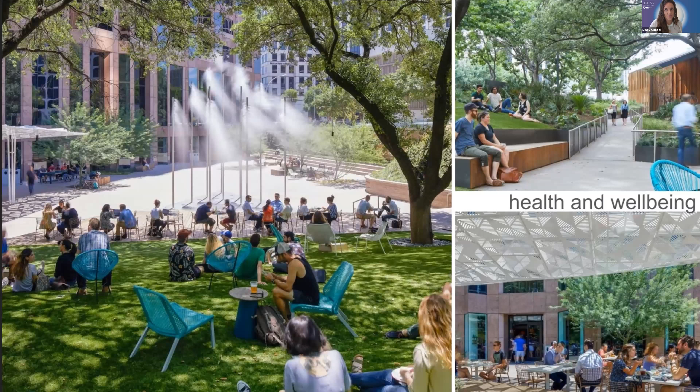We've taken big steps trying to achieve those goals on projects like 111 Congress, where we transformed a depressed plaza - you may call it depressed, you may call it depressing, whichever way you want to look at it - into a vibrant social space for eating, playing, escaping the city.

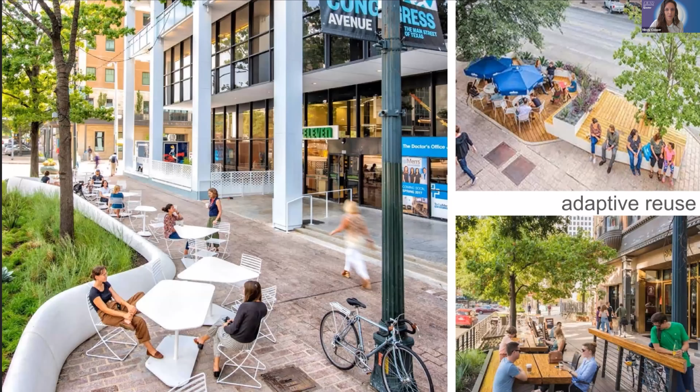We've thought outside of the bounds of typical permitting and ownership limitations to introduce things like pocket patios to Austin, reclaiming public space for people from all walks of life instead of just parking spaces that serve just a select few.

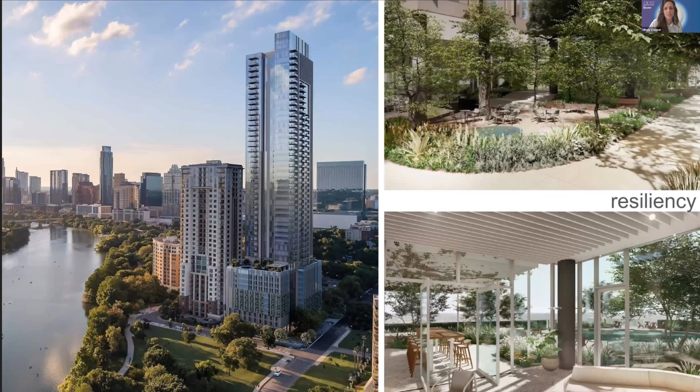We've designed experiences on both the ground floor and up in the sky, as evidenced here on a project called 44 East in the Rainey District.

And we've sought the highest level of sustainability in all that we do, as evidenced in our commitment to 100% auxiliary water use and innovative soil science towards the goal of carbon neutrality, as seen here in our Parmer campus project.

So this session is going to tell yet another remarkable story about transformation and how a highly collaborative partnership has moved the needle one step closer to achieving our vision for the future of great social and environmental change in our city. Daniel?

Yeah, thank you. And I'm getting distracted by the Zoom haircut that I'm getting. I spent hours curling my hair this morning, and we believe you.

Staying focused on this - every great story, every great transformation starts with a sense of place, a sense of history, and this project is no different in that.

For us, Fontaine Plaza and St. John's tell a really remarkable story - a story of individuals like Jacob Fontaine, and the story of the St. John's Encampment Commons. It was really about understanding and working with leadership in the African American Black community here in Austin, about understanding the purpose of Fontaine and of this place in its history, about education and raising up leadership.

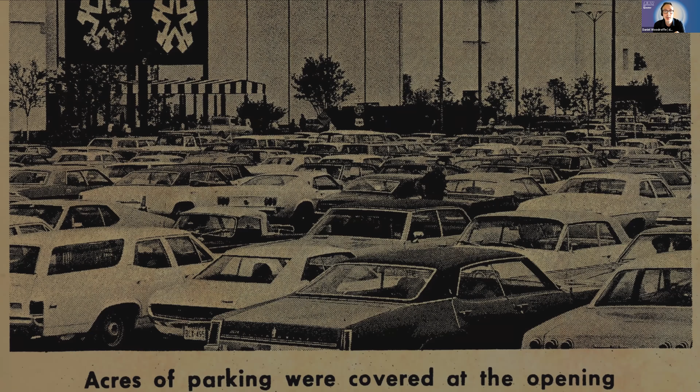It was certainly all parking lot and no parks. And one of the things that's really remarkable for us is that Highland has become this national model for a P3 partnership about education, anchored with sustainable, adaptive, and community-minded use. Go to the next slide.

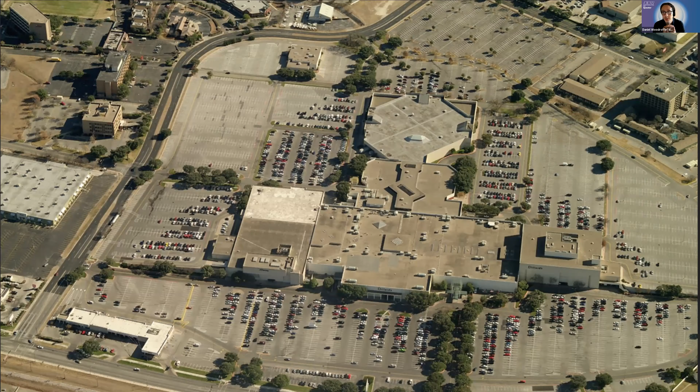Here you see the extent of the mall - it's almost 80 acres of concrete and asphalt. And the next slide again.

So a number of years ago, Red Leaf Properties led the effort to form a public-private partnership with the Austin Community College to acquire and redevelop this property - the literal sense of transformation of taking a now defunct mall that had closed and reinvigorating the entire 80 acres.

Of this 1970s era shopping mall into an innovative learning center, transforming the surrounding parking lots into a really social and equitable mixed use urban project that has a combination of signature parks and trails, and today is quickly becoming one of the premier destinations to work, educate, recreate, and explore. But it's also really importantly home to Austin Community College's largest campus.

And it's rapidly emerging as this kind of really profound model of diversity and social and equity, and a place to work and educate, recreate. So for us to be participating in a small part about the landscape transformation was really, really special.

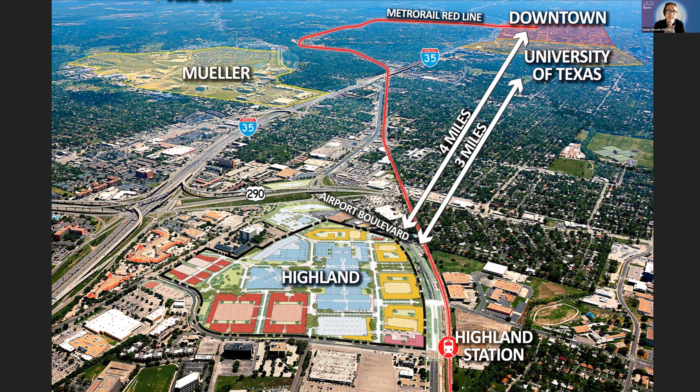So I'll hand off to Lauren now just to go into a little bit more detail about the how and the why. Sure.

So the overall project massing and orientation is an example of a true mixed use development, as you can see here.

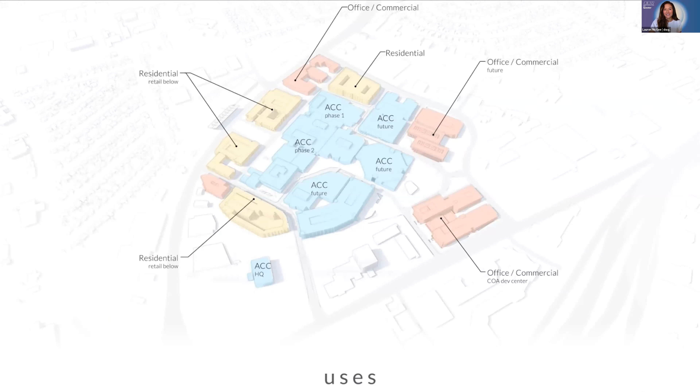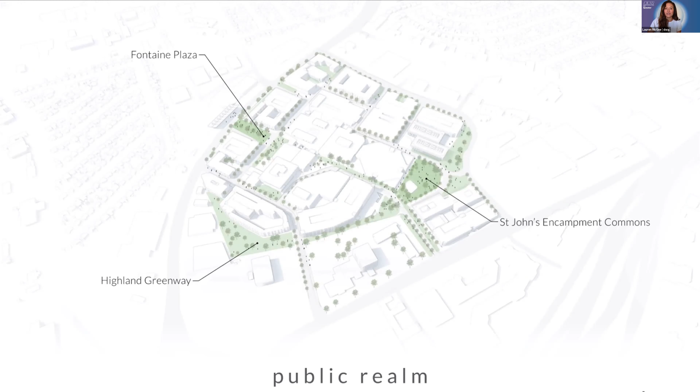Thank you, Mindy. The two signature gateway parks are strategically located at the ends of a green spine that bisects the centrally located ACC campus, Fontaine Plaza on the west, and St. John's Encampment Commons on the east. Together, they serve as anchoring points for the campus and are also major moments along the linear hike and bike trail that encompasses the entire campus. Fontaine Plaza is a 1-acre park that aligns with the original mall entry drive and will in time be in alignment with the future relocated Red Line station.

I'll hand it back over to Daniel. Thank you. So as designers, there is a huge importance on this process of storytelling and about really doing our due diligence to understand the cadence of the project, not just the project boundaries of what the client has dictated and mandated through a project brief, but understanding the sense of place, the sense of purpose and time and storytelling that occurs.

And for us, we believe very strongly that a project should start with a very clear thesis. And that thesis for Fontaine Plaza was very much inspired by Austin Community College's own guiding North Star about the community college district will be recognized as the preferred gateway to higher education and training, as a catalyst for social equity, economic development, and personal enrichment.

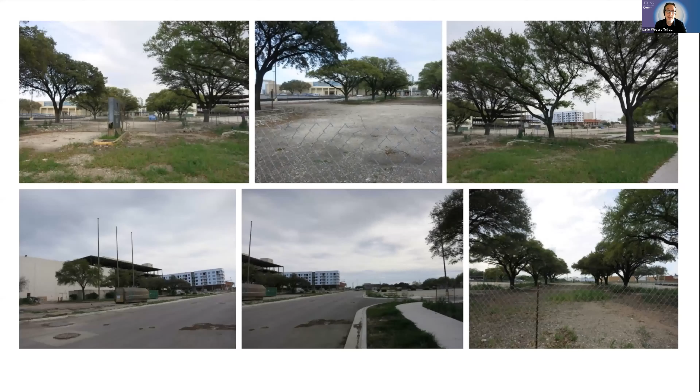And that starts with analysis. And that analysis really looked at the sense of, as Lauren had stated, the parking lot to park, the sense of the former road into the mall now being this potential for a park. And one of the major assets that we had was a sense of existing trees.

We developed a very clear program that looked at understanding that green spine. And through that, in terms of working with Redleaf and with McCann Adams and also with the adjacent design teams of TBG Partners and Lake Flato and a host of others, Coleman and the architects for Highland ACC itself, this really kind of collaborative process of understanding how we can build this thing up.

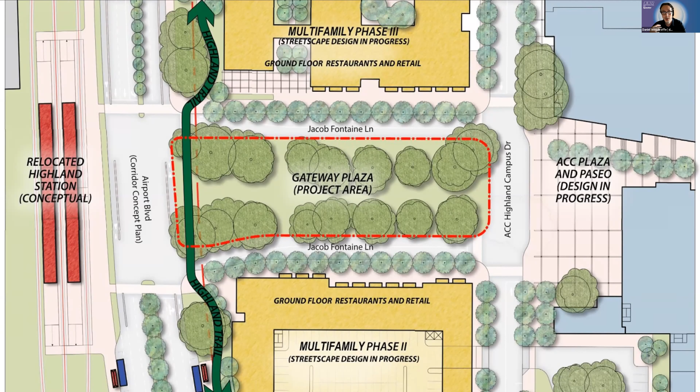And we often start in an analog formation about really understanding the sense of movement and flow and gathering, and that sense of how we can not only connect edges, but also create these inspiring moments at a variety of scales that help to weave a story, a thread through this process.

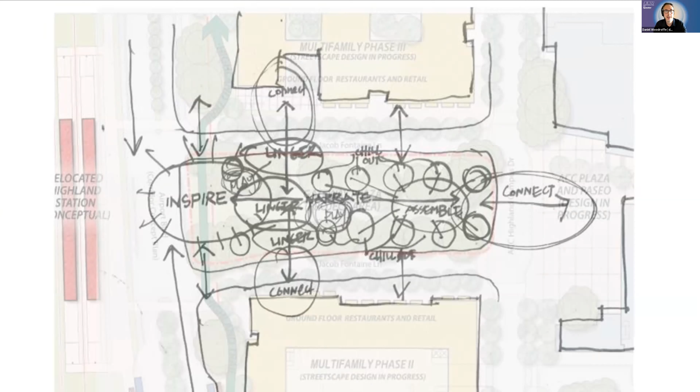But that process is not singular, it's very much a nonlinear and iterative process of testing and retesting. And so it starts with analog sketches. It starts with understanding the limitations or requirements of preserving and enhancing the trees and considering them a vital infrastructure.

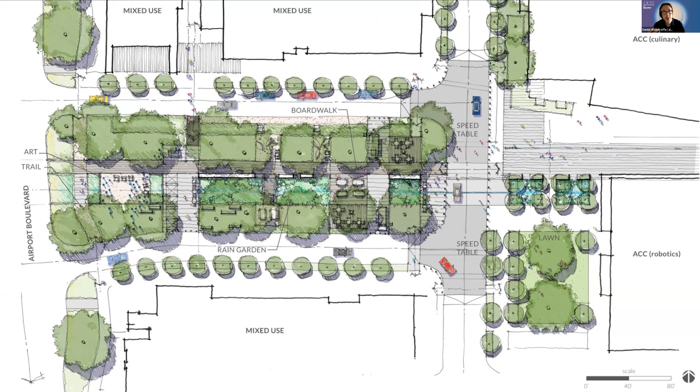And then as we move through the design and start to develop digital massing models, so we move from a plan view indication and diagrams about form and space into more of the three-dimensional, even four-dimensional in terms of how we imagine ourselves being in these spaces.

And it allowed us to quantify and develop metrics about this project having a profound impact on impervious cover and about impacting the environment larger than just this project, by deducting the road and deducting the parking lot, seeing up to an 85% reduction in impervious cover.

And as a result of the additive process of landscape and lawns and preserving those trees, the site now effectively becomes a sponge and is able to intercept and filter almost 500,000 gallons of water a year that would otherwise have just flowed downstream into the storm drains.

And so as a design challenge, it was also about not just understanding how to save the trees, but how to promote as a baseline that the sense of sustainability, the sense of sustainable sites, is very attainable not as a mandate, but as a baseline expectation of what a really great project could be, and doing that in a way that actually demonstrated to the client that it didn't cost any more. And so we were very thoughtful of that.

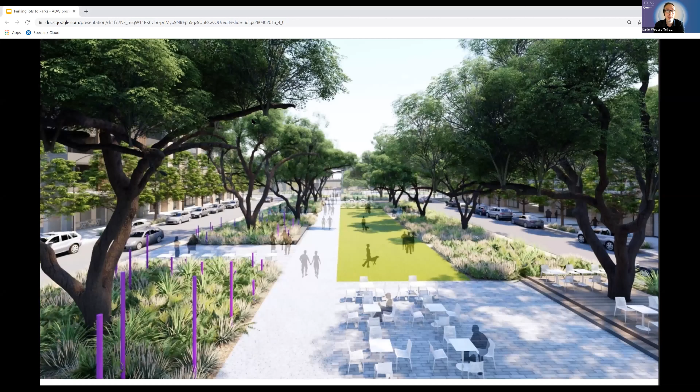ACC actually wanted to put a big monumental blade sign on Airport Boulevard and said, we want a giant ACC logo. We challenged that and said, would you entertain a more artful solution that looked at lighting as a really evocative tool? And that actually worked.

We developed a concept called Thicket that took an abstract of the ACC logo, the river bat, and imagined not an abstract of a bat itself, but bats with movement, bats in terms of the cadence of day and night, and a sense of embracing change and extending the life of this space for people, making it a really engaging and evocative space that changes throughout time of day, time of year.

That's where this sense of digital modeling allowed us to really create an image that was unique and special. We worked with Ion Art to prototype and come up with this. We've been very blessed that this project has now progressed.

So Lauren, yes, we would love to take you on a virtual tour of the construction, and this is happening.

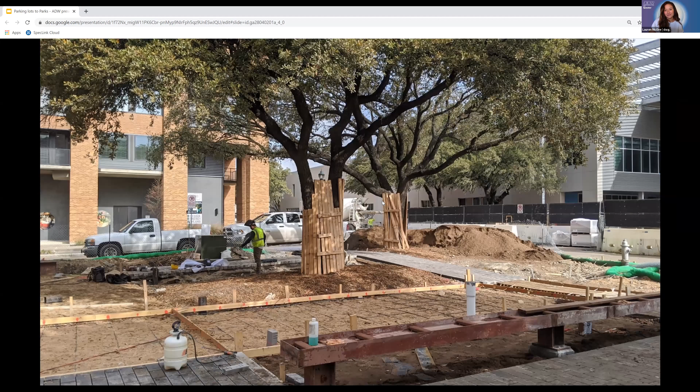Here, permeable pavers have been installed, and they're starting to install the reclaimed steel benches, which are made from salvaged beams of the old mall. We actually selectively tagged the beams to be used for these benches, just adjacent at an adjacent site. In the background is where a deck will be installed later on in the photos.

Something that was really important was working around the root zones and making sure that those footings were outside the half critical root zone for the tree's health.

Here in this photo, all of those little silver pipes sticking up are actually the footings for the art installation. There are 73 poles that are part of this art piece, and they range from 3 feet to 20 feet. So some of these footings had to be pretty substantial.

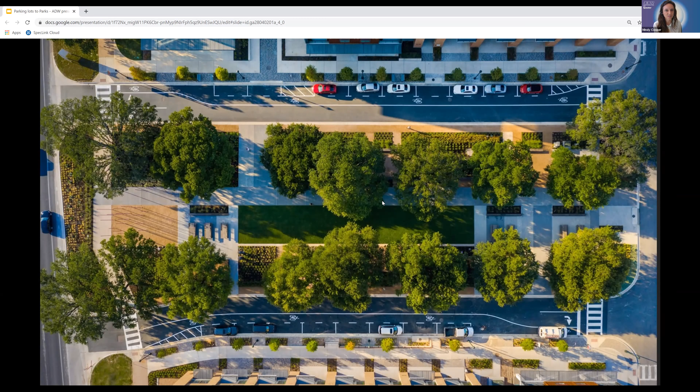At the end of it, when we were able to get some photographs of the actual thing, one of the most rewarding comments we received was, wow, the actual thing looks better than the model. So even in our perfect world in the computer, what actually got built is, I think, 10 times what we would have anticipated from just the drawings and vision alone. Our socks have been completely knocked off, I suppose.

The really great news is that with Fontaine Plaza complete, we've now been invited to join ACC and Red Leaf in looking at St. John's Encampment Commons, which was that eastern punctuation to the green spine Lauren described earlier. So we'll take a couple of minutes to give you a brief overview. That project isn't quite as far along as Fontaine, so we'll give you a little insight into what's happening there and what the plan is for St. John's.

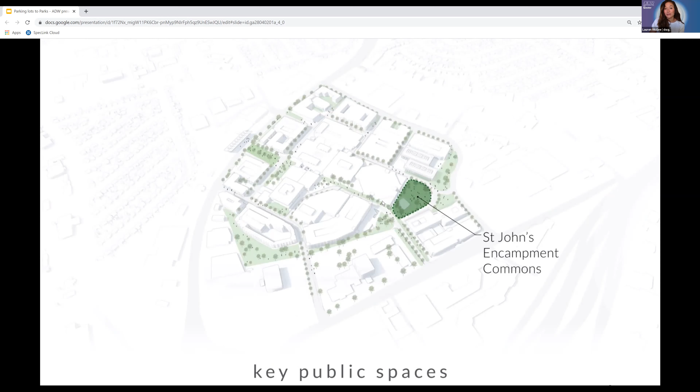Thanks, Mindy. As she mentioned, this is at the other end of the green spine. St. John's Encampment Commons serves as that gateway from the east and is located next to the new City of Austin Development Assistance Center. This park is a 2.4 acre flagship of open space for ACC and Highland.

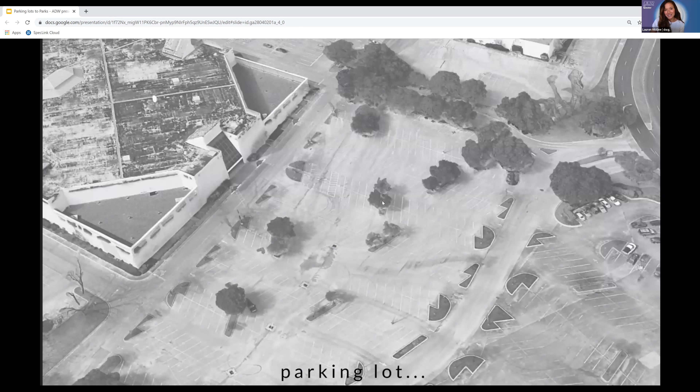And what once was a parking lot in front of the old Macy's building, a large, very large parking lot, has been shaped by a poetic vision, as you see here, that sustainably transforms the site.

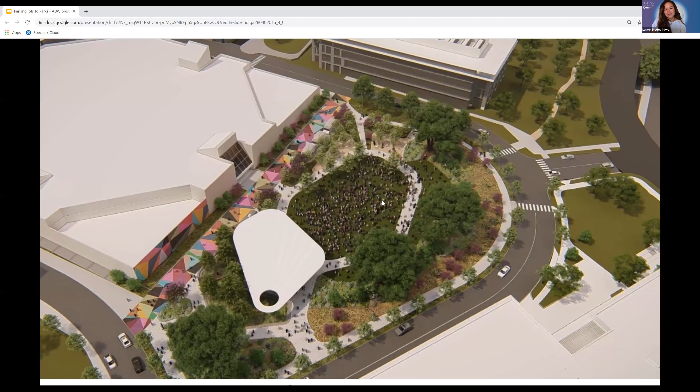Drawing on inspiration from the site's legacy as a place for gathering, the design provides areas for events and meetings, both small and large. It was envisioned to be a place to gather together, and ACC sees this park as an amenity, not only for the college but also for the community, to be a social hub where people can gather and celebrate.

Seating areas are tucked under groves of trees to provide refuge and respite on hot Texas days. And there's an ample amount of flexible open space to accommodate a variety of programming and the daily cadence of life within the Highland community.

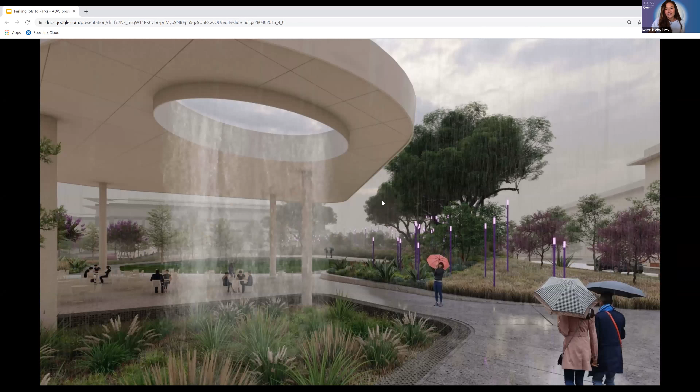There's a large emphasis placed on sustainability with low impact design, innovative water quality solutions, and reduced impervious cover. This park will take off 1.2 million gallons of water that will stay here instead of being diverted into stormwater. So that's really great.

And there are beautiful heritage trees that were also on the site that needed to be emphasized, and are really key features of the park now. It's a place where convocations and graduations can eventually take place.

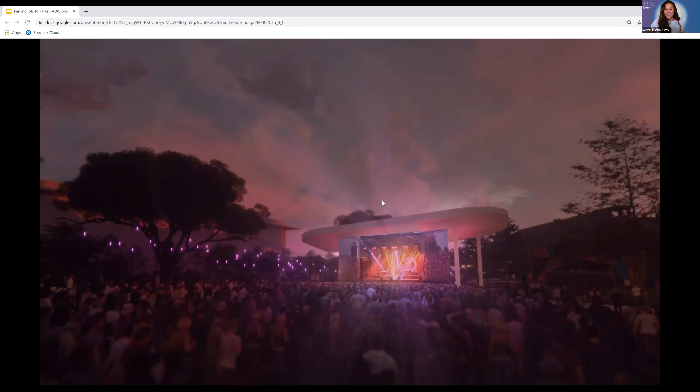And here's maybe a night that a big event could occur. It would be so great to have everybody come together again, hopefully after COVID's over, and just celebrate the history of the site while looking forward to a bright future.

Yeah, Lauren, maybe we should have re-rendered that shot to show park space circles and an appropriate kind of distancing.

But for us, this project has been a really remarkable transformation, and one that has been a fun process of developing friendships and relationships, about understanding the history and importance of this site and of the real meaning of transformation.

And when we started all of this, not in a million years could we have imagined the importance of what open space, public open space, is starting to play in our urban environments with COVID, in terms of social distancing, in terms of access to nature, and simply access to green — the ability to have a design that is really flexible, transformative, adaptable, and nimble.

But when we thread this timeline of design, it starts with a sketch or a conversation, and the fact that we were able to physically prototype custom light fixtures and work with fabricators and geek out about set screws and colors and powder coats, and then expand that conversation from Fontaine to St. John's.

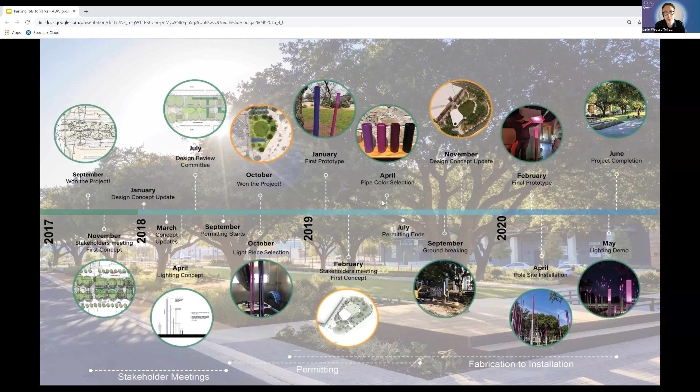And we always like to close out with some stories and reminders about just metrics and simple things that hopefully stick in your mind, that can change.

And Fontaine Plaza — only an acre, or I say only an acre, just over an acre of space — there's a lot of really technical stuff packed into it. There was a very rigid budget, and I wanted to say that a photo can tell a million words, but we didn't have an endless budget here.

We had to be very, very creative with understanding if we were going to spend money on the lights. We had to look at this and that and find a sense of balance.

But within that balance, there is that fundamental commitment to innovation, sustainability, about reducing and intercepting the amount of water that flows off-site and goes across the streets and into the lake and causes downstream flooding. About preserving and enhancing those heritage trees so that they not just look good now, but survive and sustain and flourish in the future.

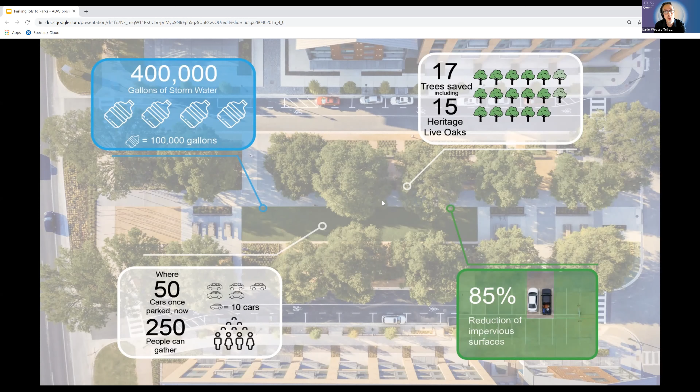And when you reduce impervious cover and remove that environment that was formerly just for ingress and egress of cars, and create a space that is safely spaced for at least 250 people, you really see the profound transformation of what it is to live adjacent to these, to go to college and study in this park. And that story just gets better and better with St. John's.

Encampment Commons being 2.4 acres, with 1.2 million gallons of water being intercepted and held on site and used to water the plants. On top of ACC themselves having a 1 million gallon system for rainwater just across the street, which we're using for all the irrigation in this park.

And further transforming and preserving trees, with close to 90% reduction of impervious cover. So that space that was relegated for 300 cars, maybe on a Black Friday shopping day when the mall was full, now accommodates 1,500 people comfortably using the park and enjoying it. And what could be better when you're picking up your permit from the DAC across the street to come over and just hang out and chill in the park under the canopies.

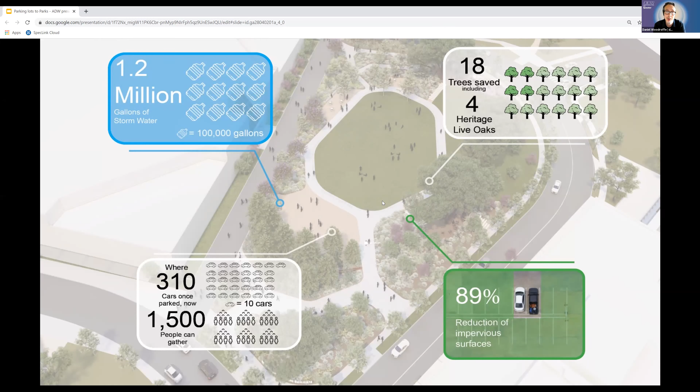None of this would have been possible, as Mindy said earlier, without the entire team from DWG behind us. This was a huge lift, but also a huge lift from ACC and from Redleaf, Brian and Matt, and the sense of trust and relationship we forged in this project. Then the consultant team - the civil engineers with WGI and Stantec, the MEP consultant with Bay and Associates, and of course Strata, the landscape contractor who pulled off a miracle to transform our vision into reality, and did it in true style. That true style being amplified by the really fun process of working with Ion Art and getting to imagine a custom light installation that challenged the role of art.

Hopefully this panel has elicited a thought-provoking sense of how we perceive our open space and what it can be when we get into a little bit of good trouble and challenge the norm and change the expectation of what it is to be equitable and resilient within the urban environment. So thank you all for listening to this.

And I've been following the chat, and there's a few questions. There's a lot to catch up on. I was just going to say, there's a few in the Q&A, and then we can try to catch up on the chat too. But do you want to, there's only 4 questions here that I can see, so maybe we should work our way through these and then go for it.